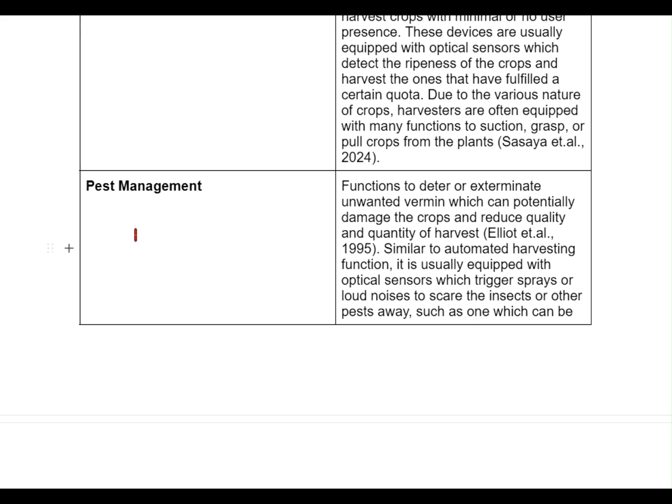Similar to automated harvesting function, it also has optical sensors which will trigger either pesticide or herbicide sprays, as well as loud noises to scare insects or other pests away. There's one created by a university in Indonesia which will create a 40 hertz wave to deter insects from rice crops. There are multiple more instances of these functions not discussed in this report.

The ideal automatic agricultural system will have everything to feed the increasing demand for food, clothing, and other human needs that come from plants. Thus, we can move on to market-ready products and systems. Multiple companies, organizations, universities, governments, and individuals have developed farming systems with minimal user input. I can't be the only person who made this, obviously. So below are some examples.

We have Easy Farming Smart House, which sells greenhouses with multiple sensors, each coupled with multiple controllers and IoT systems which are able to gather data from the surrounding environment. Multiple sensors are ingrained in parts of the soil and sometimes in the crops, and the internet controls aspects of the greenhouse to suit the needs of the plants. For example, grapevines need more sunlight, apples need more water, or maybe rice needs a lot more water actually.

Such as luminosity, temperature, and soil content - that is the technical term for this one. Of course, there are also cooling fans or heating vents in case they need to be hotter, which are connected to the system, as well as opening or closing shades required for the crops.

In Europe, there are also two agricultural engineers that started FarmWise in 2016, which released a host of products capable of reducing manpower needed and increasing farmland productivity. In 2020, they released the Titan FT35, which is a weed killer able to detect and remove weeds at the rate of half a second.

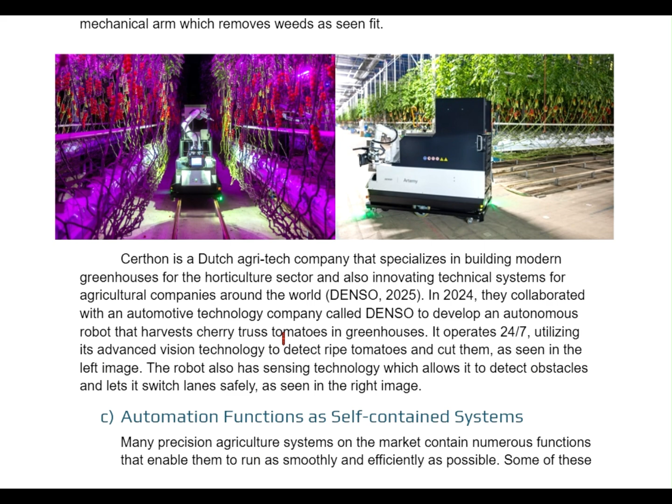Of course, there are also automation functions that are just one function. These are examples of existing products that can exist as self-contained systems for each function.

Firstly, for soil management, you have AdvanceTech soil health monitoring, Tuya Zigbee wireless, and a local one here is HOBOnet TEROS 21 soil water potential and temp sensor, even though these are just actually sensors. But some of them are also equipped with actuators which can spray the plants with water if needed. So common sensors and actuators needed are moisture sensor and temperature sensor.

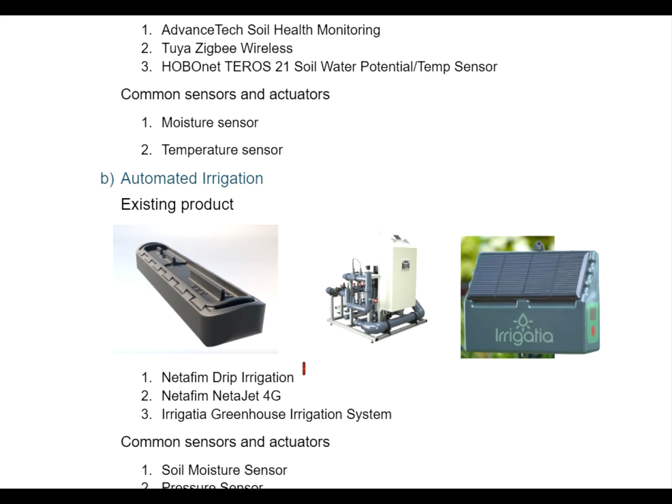Added here is supposed to be a spray or a pump of water, which is a segue to automated irrigation, which includes both Netafim Drip irrigation and NetaJet 4G, and also Irrigatia greenhouse irrigation system. Some common sensors are soil moisture sensor, pressure sensor, and of course the water pump.

Crop management has Farmonout crop health monitoring, TopCon crop spec, and crop analytica. Some common sensors and actuators include the optical canopy sensor, integrated multispectral sensor, and application valves such as fertilizers, pesticides, and for other treatments. Some of them also include a water pump, as for, of course.

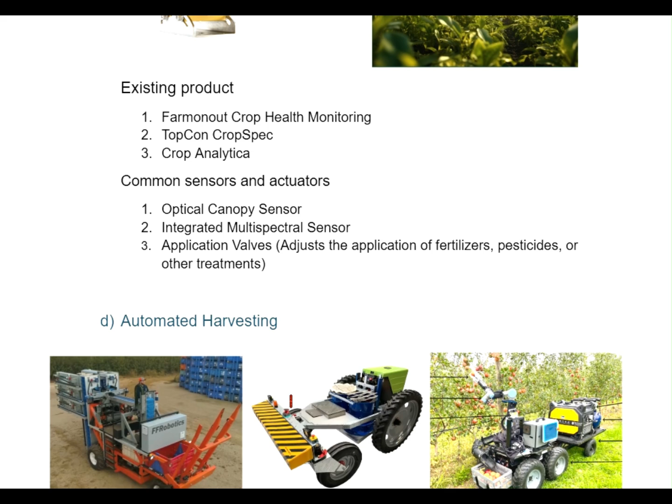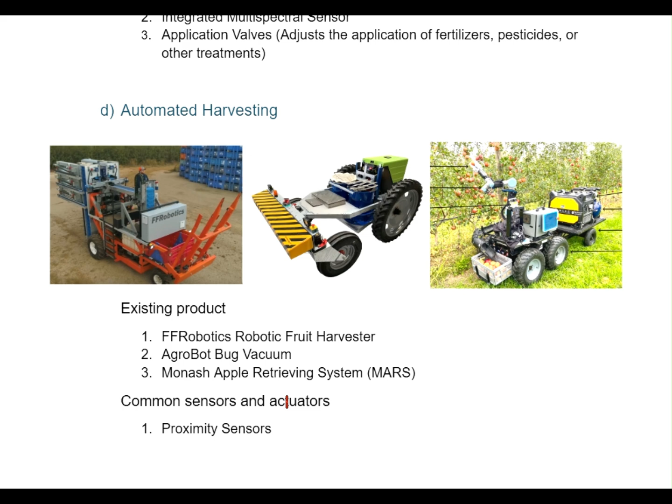Now to automated harvesting, we have FF Robotics robotic fruit harvester, specifically for apples and strawberries usually, an Agrobot bug vacuum, which is smaller, and Monash Apple Retrieving System, or MARS, obviously for apples. These usually have proximity sensors and a robotic arm, though some of them also have a vacuum and a drive motor or any kind of way of mobility.

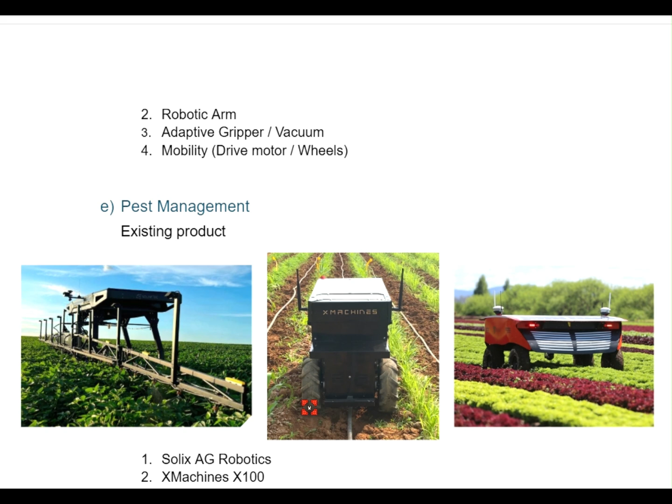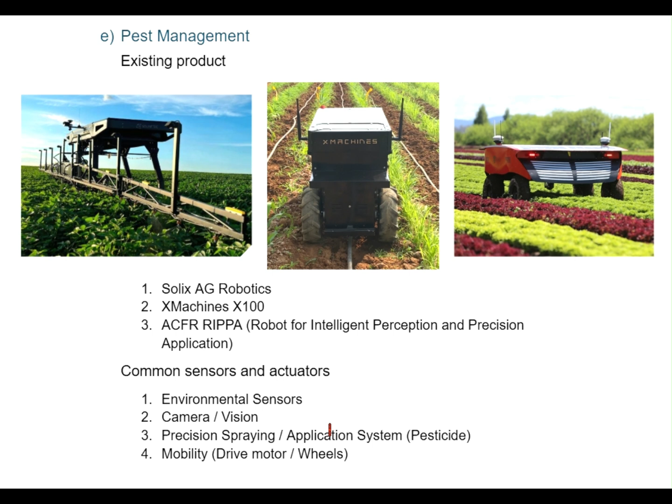Lastly, we have pest management. The existing products we have are Solix AG Robotics, X Machines X100, and ACFR RIPPA. RIPPA stands for Robot for Intelligent Perception and Precision Application. Some common sensors they have are environmental sensors, which are soil sensors, oxygen sensors, and infrared sensors, camera or vision, as well as precision spraying so they don't kill other bugs or plants. And of course, a way to move around, which is mobility, such as drive motor and wheels.

Now we will move on to the second part of the portion, which is the logic gates.

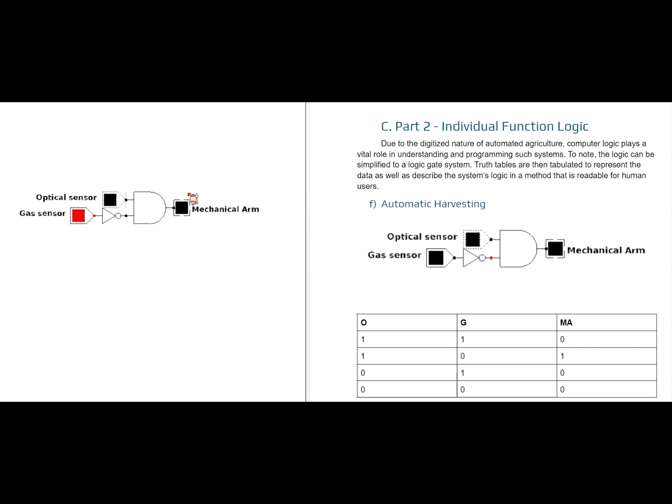So this is the automated irrigation. We have a moisture sensor and temperature sensor. This is for the soil.

If it detects that the moisture is lacking and the temperature sensor is also lacking, it will activate the sprinkler. However, if they sense that it has been raining, the sprinkler will not turn on because it's been sprinkled by nature. However, if the moisture sensor senses everything's okay and temperature is also okay, it will also not turn on because it has rained, obviously. Let's move on to the next one.

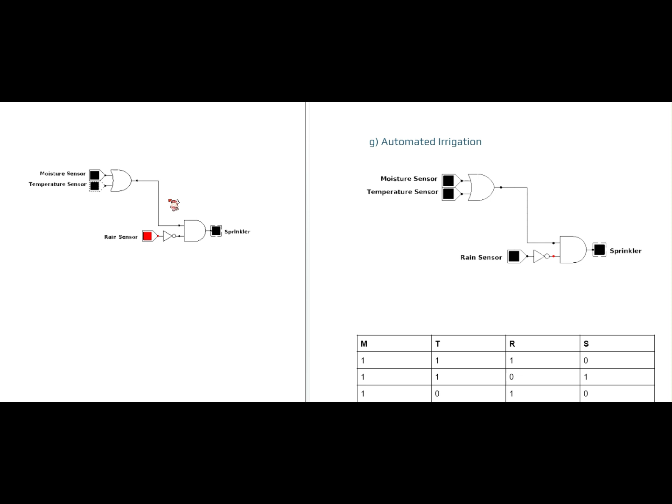The logic equation for automated irrigation will be: negation R for M plus T equals to S.

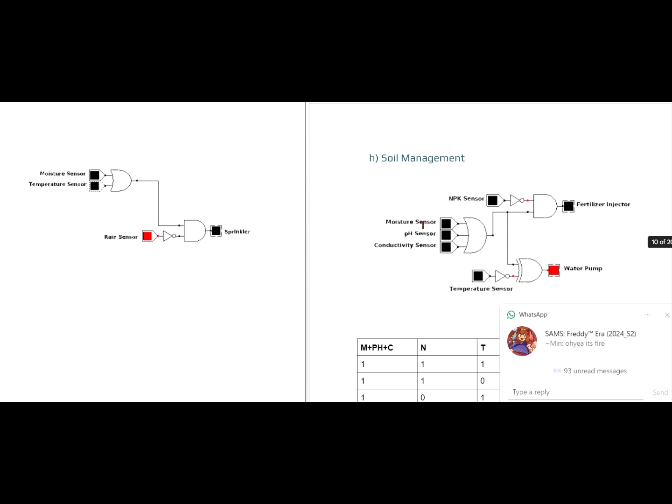Next one is the soil management, which will be opened shortly. So the NPK sensor, moisture sensor, pH sensor, conductivity sensor, and temperature sensor here. For soil management, there will be a moisture sensor, pH sensor, and conductivity sensor.

If these turn on, that means there is something wrong with it. But if they sense that it has been given nutrients, it will not turn on because the fertilizer injector should not fertilize something that is already fertilized. But if it's not, it will turn on.

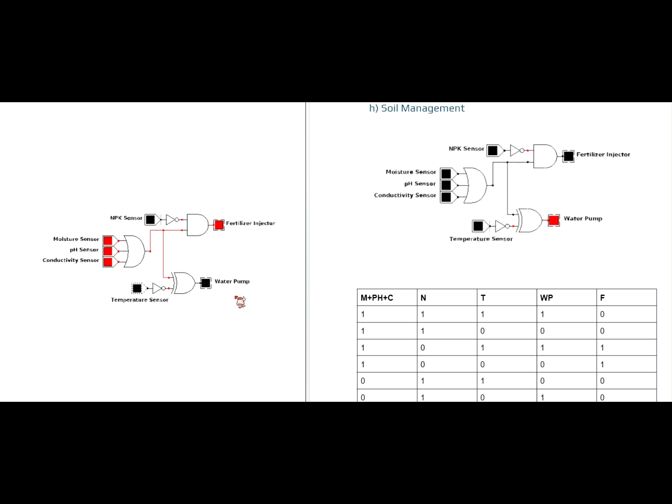Meanwhile, they're also connected to the temperature sensor here, and only when there are XOR gates here, then it will turn on the water pump. If they sense everything is A-OK, then the water pump will not turn on. So now let's move on to the logic equation for this, which is, well, you can see it here.

Next one will be crop management, which I will cover shortly. All right, so back to crop management here. We have two guests that are returning, temperature sensor and moisture sensor. Oh, never mind, these are actually for the plants itself.

Meanwhile, the oxygen and conductivity sensor is a returning guest for the soil. And there's also an optical sensor, which will detect directly if the plants need something.

So let's, for example, turn on this temperature sensor. It senses something wrong. Moisture sensor also senses something wrong. If the optical sensor sees nothing wrong, the water pump will not turn on.

But see what happens if I press this. As you can see, the water pump will also turn on because I also put the oxygen sensor on, meaning something is wrong. The fertilizer pump also turns on.

And if they detect nothing else wrong, it will turn off. If there's nothing wrong with the conductivity or oxygen, it will also turn off, but only for one function here, one actuator. So this optical sensor is for both the water pump and fertilizer pump, but it also depends on the two sensors that are connected to either the crop or the soil.

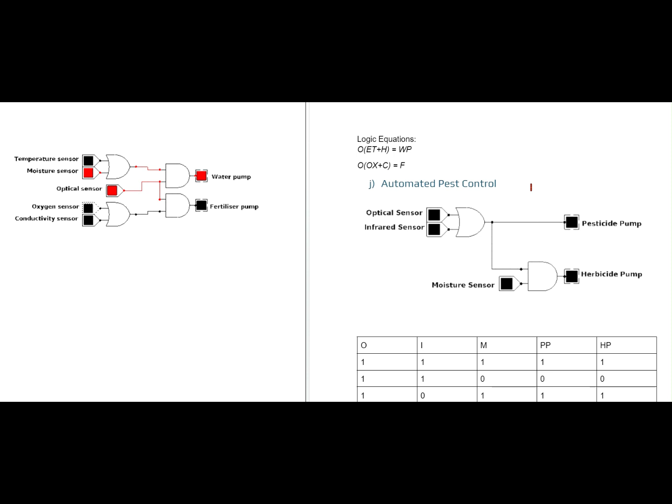So now let's move on to the last part, automated pest control. As you can see, the logic equation is right there. Move on to automated pest control.

We have an optical sensor which sees the pests, an infrared sensor which will detect the pest's heat. If they sense either of these, the pesticide will turn on. Either of these. And for herbicide, it will also sense the moisture sensor here.

If they see nothing, the herbicide pump will not turn on. But if they sense something, or the infrared sensor senses something wrong, then they will turn on. The pesticide pump will also turn on just in case there are pests around, especially underground.

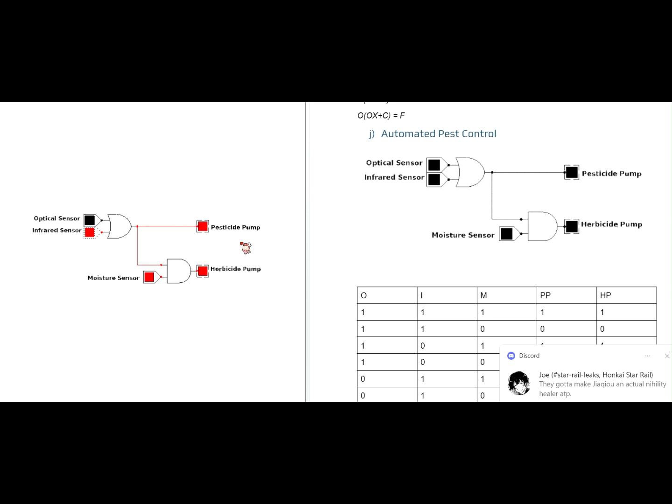As you can see, they have a much more understandable logic equation: M times O plus I equals to HP, or O plus I equals to PP. PP is the pesticide pump, HP is the herbicide pump. And the others should be straightforward.

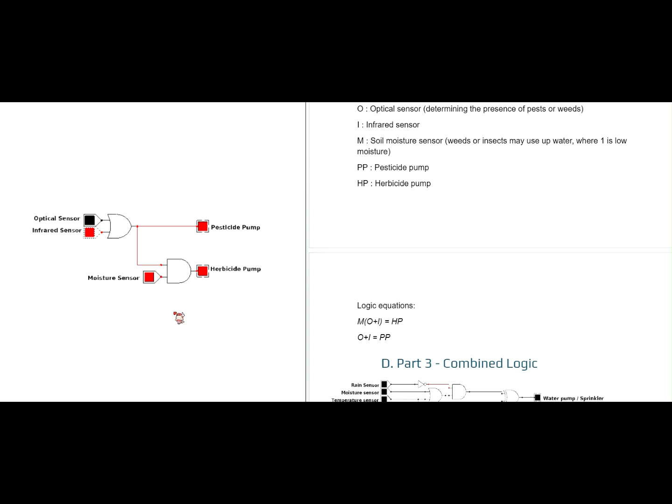Now let's talk about the combined logic, which we covered in the next part. This time it's part 3, which is combined logic. So here you have the individual system logic design with all the 5 functions combined into one precision agricultural system.

You have all the sensors here on the left and all the actuators, which are the pumps usually, on the right, except for one mechanical arm. Here we also have manual switches so that users can also manually override the system to probably harvest themselves or pump themselves, who knows.

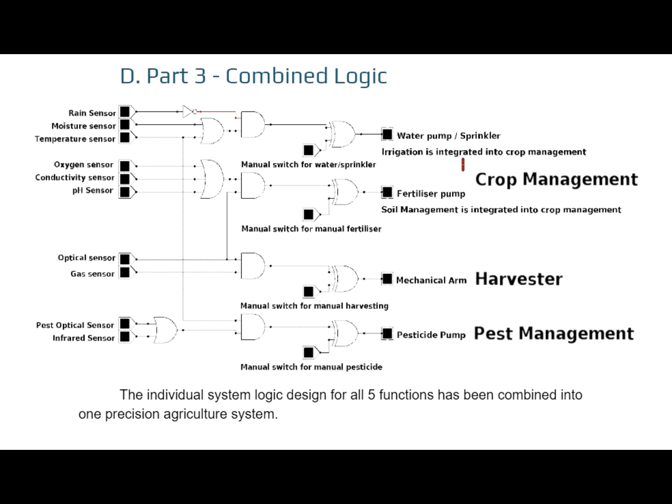As you can see, if you have noticed here, one of the herbicide pumps is gone because we want to focus on pest management. And also, if you have noticed, the irrigation system is gone — it has been integrated into the crop management as well as the soil management.

So let's move on to the soil management here. Irrigation and soil management functions are integrated into the crop management because they share the same circuit, which is the water pump and the sprinkler.

It will also function with the harvester function using an optical sensor, modified with a manual switch. On to crop management as well, the water pump, sprinkler, and fertilizer pump can be manually switched off if needed for certain tasks, such as manually spraying specific amounts of water or fertilizer onto the crops.

There is now a harvester which will share a sensor with the soil management function, with a manual switch added for the mechanical arm, so the arm can be turned off if the farmer wants to harvest manually.

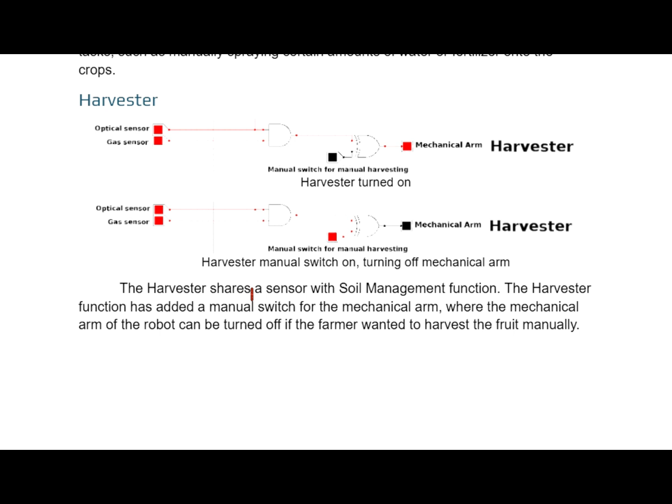And that is all for part 3.

I will now give it to Marcus for part 4, which is the mock code of how this system works through the AI of the system. Thank you. I'm Marcus, and I wanted to show you part 4 for computer systems, the coding part.

So I have created multiple abstracts. As we know, for real situations our agro system needs to be extensible, so you can think of it as an add-on. We have state event, state listener, component, sensor, actuator, self-contained system, and agro system.

For example, with sensors we can reuse the class to create temperature sensor, humidity sensor, rain sensor, oxygen sensor, conductivity sensor, pH sensor, optical sensor, infrared sensor, gas sensor, and pest optical sensor.